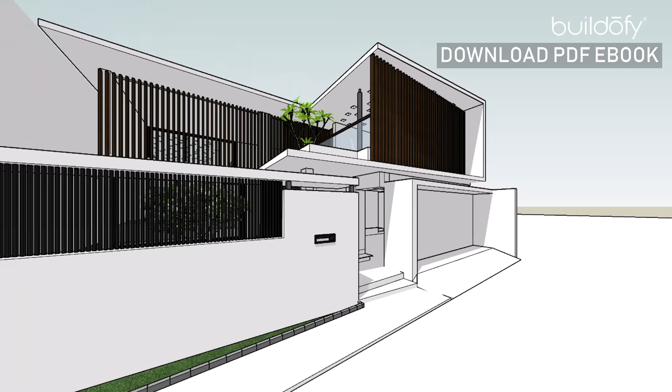We designed this house for a doctor couple and their 10-year-old son. The requirements were pretty straightforward. Privacy was essential as they work long, odd hours. They wanted a 4-bed house with a media room, gym and kitchen, and basic Vastu considerations to be included.

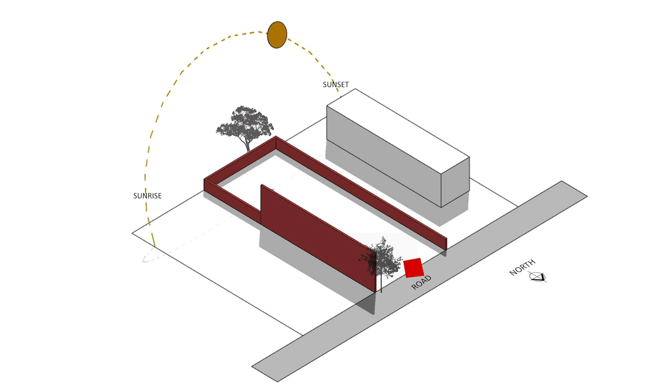The site is about 100 feet by 60 feet and it is north facing. When we first visited the site, there was an existing 20-foot tall perimeter wall on the eastern side that ran up to half the site. So that kind of became a parameter to start working with. Also, there was an existing flowering tree at the site entry which we had retained.

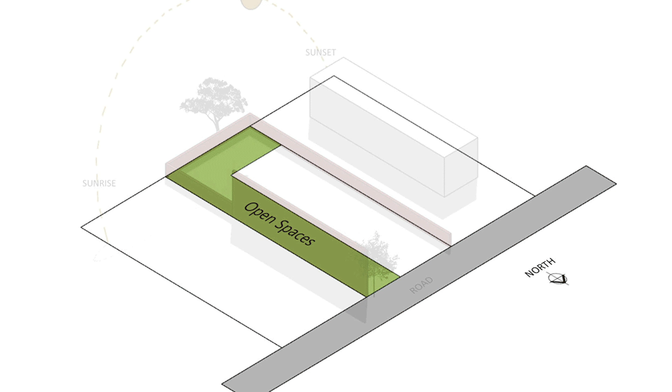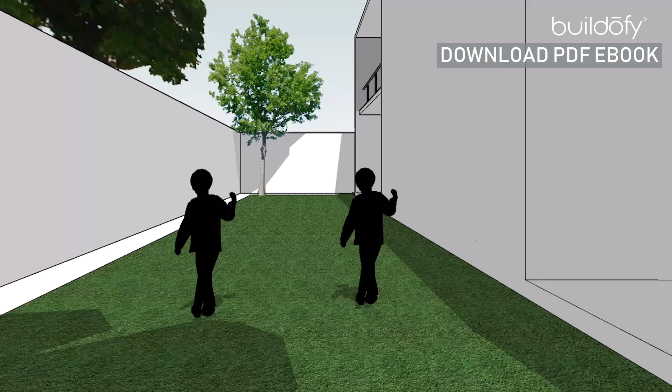We planned the massing such that there are two major volumes oriented in the north-south direction. The volume near the entry has public space like living, and the rear one houses the bedrooms. By doing this, we created 3 gardens that intersperse between these volumes.

A horizontal volume in the western side ties everything together. All services and circulation were planned here.

We wanted to keep the facade as simple and open as possible, but also achieve privacy. So we tried using vertical louvers. The louvers are backed by glass in living areas and are left open in garden spaces. Even the car parking gate is a perforated rolling shutter. We thought these kind of openings and perforations would be a little more inviting than blank surfaces.

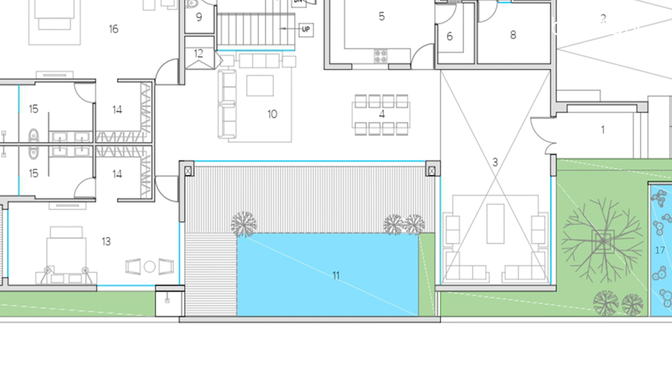There were 3 gardens. The central garden abutted the existing neighbor's perimeter wall, which was around 20 feet high. So we thought this would be the ideal location for the pool as it offered privacy. Eventually this pool became the central courtyard to the house. The bedrooms, dining and all living areas have view of the pool.

The rear garden is a rectangular space about the size of a badminton court. This could be used for some outdoor play and small private parties.

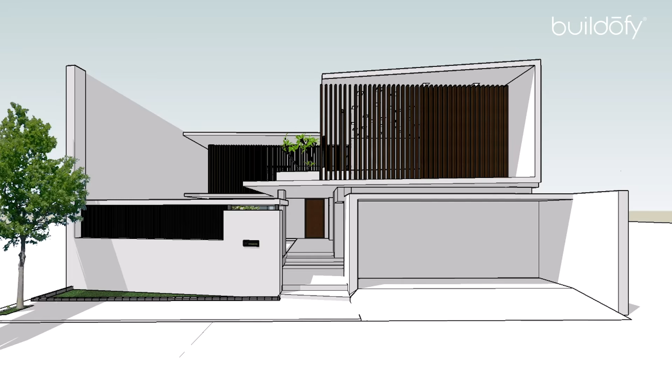In retrospect, we feel this building could be COVID friendly. I say this because all the bedrooms and living areas open up on 2 sides, either to a garden or a pool. These openings offer natural cross ventilation and lighting. All the other programs like say the living, dining, media room and gym have garden on at least one side.

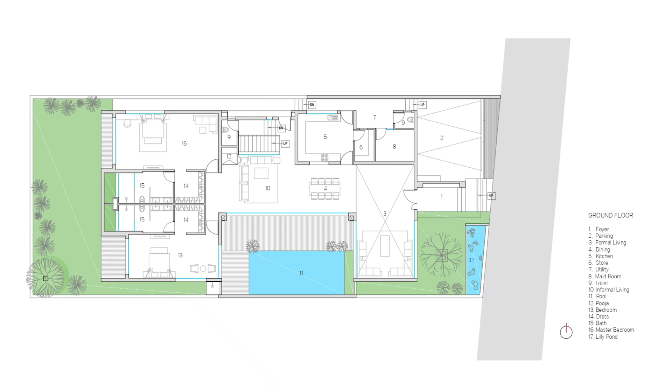A gym which opens into a small terrace garden is located on the first floor. This small terrace garden overlooks in turn the northeastern lily pond and garden on the ground floor. We have also created small 3-feet garden pockets abutting the shower in all the toilets.

We wanted to use locally available manpower as much as possible. So we made sure most of the construction team was from Pudukkottai, except for a few who were from Trichy.

We have tried to balance the requirements of an urban home with that of a farmhouse in this project.